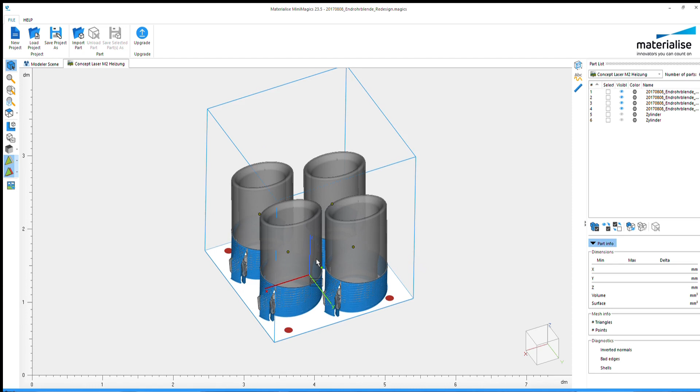So let's start with a simple breakdown along the process chain. Let's assume you finished the design of your metal part. The first step to printing is to prepare the data for the printer. Now, the cost of data preparation is mostly driven by the engineer or technician who is performing it.

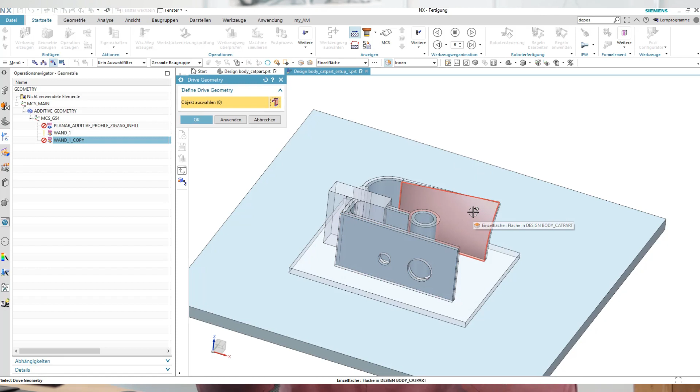The duration varies from a couple of hours for very mature data preparation software, for example for powder bed fusion, to more time-consuming programming steps for many of the especially high deposition rate technologies like powder laser deposition or wire arc deposition, which can take up to a whole day even.

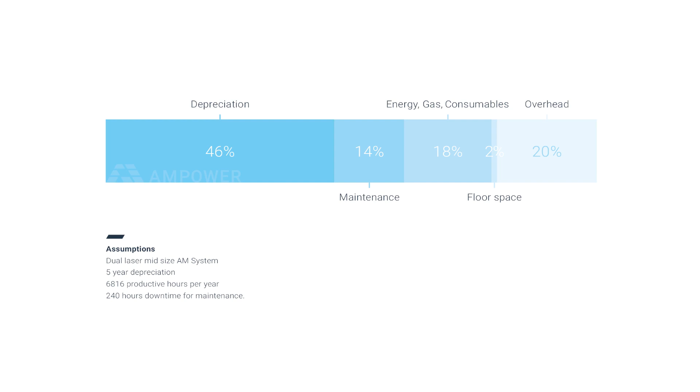Now, once you finish preparing the data, the next step in the cost calculation is setting up the printer. Major cost components now are the operator and the printer. The printer cost itself is mostly characterized by an hourly rate, which includes depreciation, maintenance, consumables, floor space, and probably an overhead. And the most variable factor here is the depreciation.

It is calculated by taking the total invest of the printer, including shipping, installation, and other necessary investments, and dividing this by the usable number of years that your local tax law is allowing you for duration of the depreciation. In Germany, that's 5 years in many cases.

Now, in order to arrive at an hourly rate of depreciation, you need to divide this annual value by the number of productive hours of your printer. In many cases, the hourly rates of metal 3D printers range between maybe 10 euro for a less complicated metal FDM system up to 100 euro per hour for larger powder bed fusion systems, for example, or even more than that.

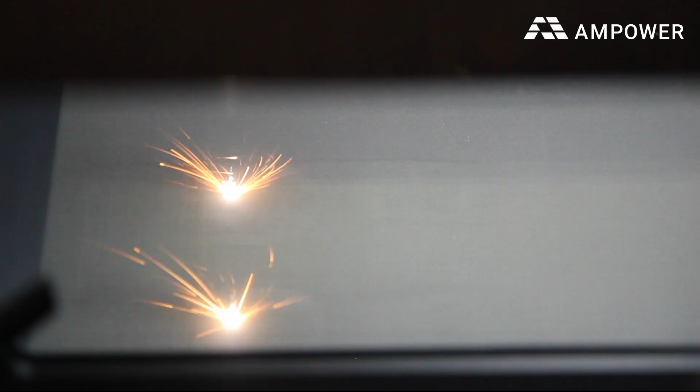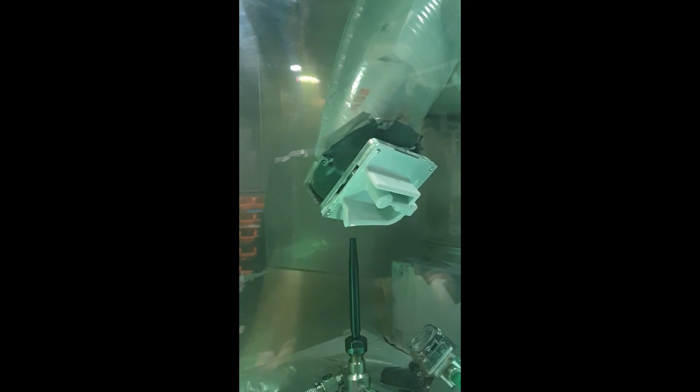Now, the next step of the process is the actual print. Here you have two major cost components, the material feedstock and the machine rate. For the material feedstock, you have to consider the printed part, but also some losses, especially while working with powder technologies. And material for the necessary supports you have to look out for, and for offsets or material that needs to be machined afterwards, you need to print that as well.

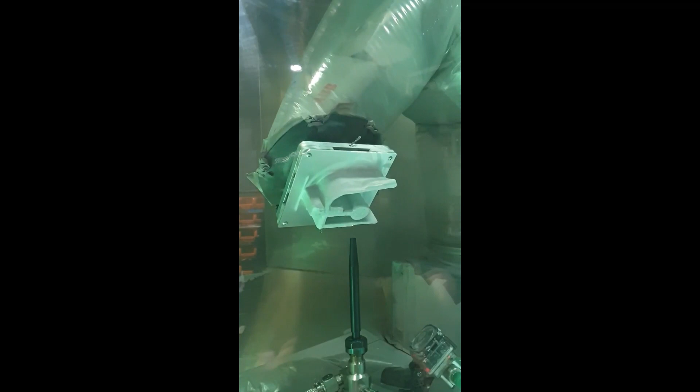Now, the machine rate is multiplied by the number of hours the printer is running. Pretty simple. Unfortunately, this value of machine run time is sometimes very, very hard to determine before an actual print. There are several estimations that have to be included, such as recoating time, deposition rates, cooling time, and packing density.

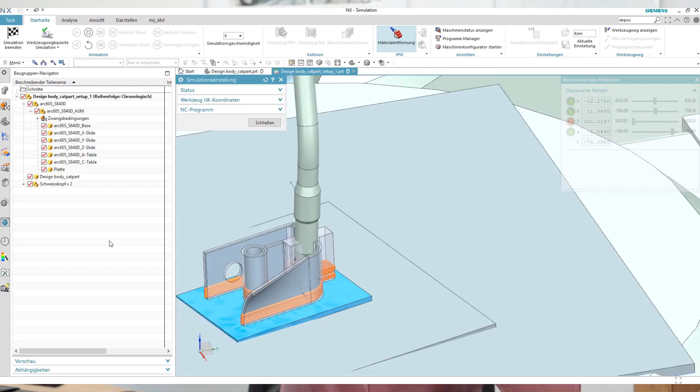There are three basic principles when calculating the production time of a printer, and they vary depending on the type of printer you're using. There are printers that are moving ahead along the base plate and printing the part step by step, and they're mostly only printing one part at a time, as you're used to in metal FDM or most of the HDR technologies.

This print time is very much dependent on how long the head moves to print the part, and thus is very much dependent on the actual volume of the part.

Now with powder bed fusion, it's a different story because you're printing probably multiple parts at once on a base plate, and you have a recoating process of the powder in between. But the recoating always takes the same amount of time, while the actual printing is depending on the volume you're printing. With binder jetting, it's yet again a totally different story, because in binder jetting you don't need supports, and thus you can stack parts on top of each other.

And the binder jetter, the print head, is actually printing, it's not dependent, the printing is not dependent on the volume you're printing. So the print time for the binder jetting process is always the same time, and the costs very much depend then on how many parts you can actually put into one print job. The more volume you can put into the print job, the lower the cost.

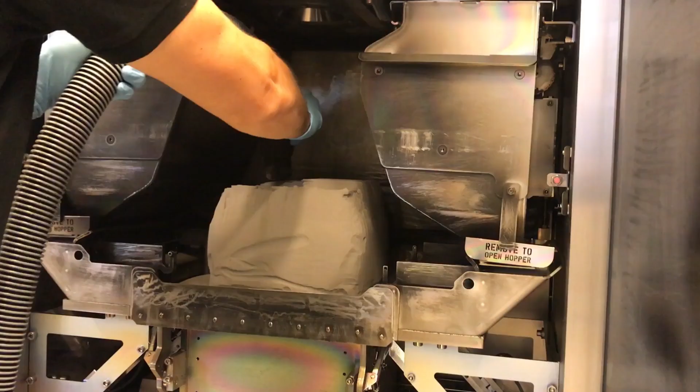Now, those are the basics of the printing itself, but what happens afterwards? After printing, the post-processing steps begin, and they differ a lot between the different technologies. For powder bed fusion, parts usually have to be depowdered first, which is followed by a heat treatment to relieve process-induced stresses, and afterwards parts can be removed from the platform and supports can be removed.

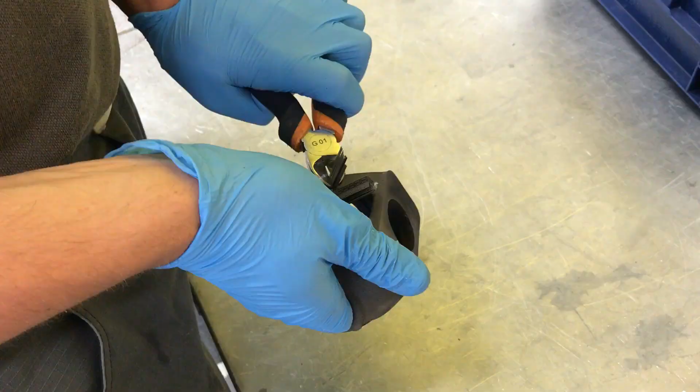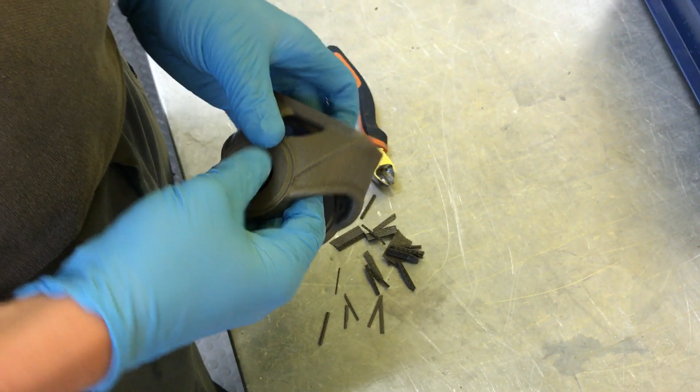Now, depowdering and support removal are still mostly labor-intensive and manual processes, and the costs are driven by the hours that a technician needs to go through them. Heat treatment, on the other hand, is quite a low-cost step, and it mostly depends on what kind of oven you use and how many parts you can move into the oven at the same time. Usually, though, the furnaces are quite low cost, and the costs don't have such a high impact on the total cost of a part.

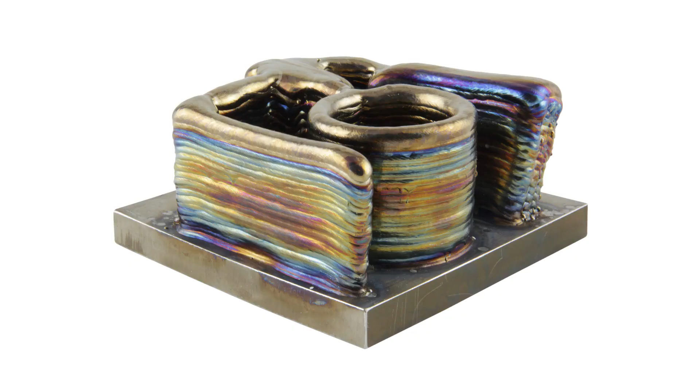For high deposition rate technologies, heat treatment can be an option, but it depends on the geometry. Some parts are simply too large to fit into a furnace, and many times the parts are not even removed from the build plate, but the build plate is actually a part of the printed part. But in almost every case, HDR parts have to be machined from all sides after printing, because you're just printing a raw part in the end, and those costs largely depend on what kind of part you're actually printing.

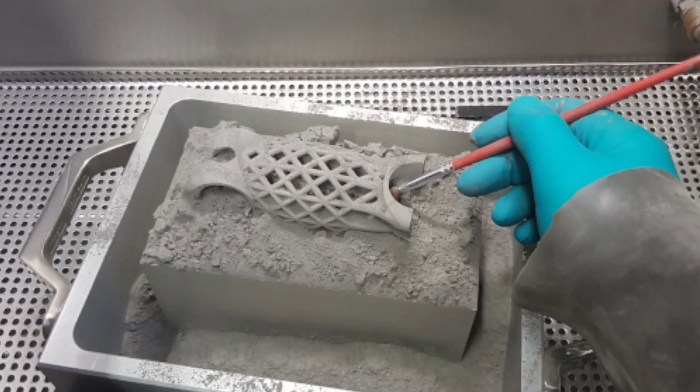Binder jetting parts have to be depowdered as well, which again is a very manual process, especially because removing powder from binder jetting parts can be more tricky since the powder is much more dense together. After depowdering, the parts have to go through a sintering process where the furnace and consumables such as gas or electricity have to be considered.

Now to the actual question, how much does metal printing cost? We developed a cost calculator which is very easily accessible via this website, and here you can type in the volume of your part, the dimensions of your part, the number of parts you want to print, and the group of alloys. The calculator then gives you a range of the cost, a min and a max value. That's the range of the cost where it might be for printing it in-house.

Now, if you don't just want to go into a calculator and don't have a specific part, and you just want a ballpark number of typical production costs for metal 3D printing parts, then you can use average values for different technologies and materials based on the cost per volume. If we neglect machining and any quality management related costs, I can give you an example.

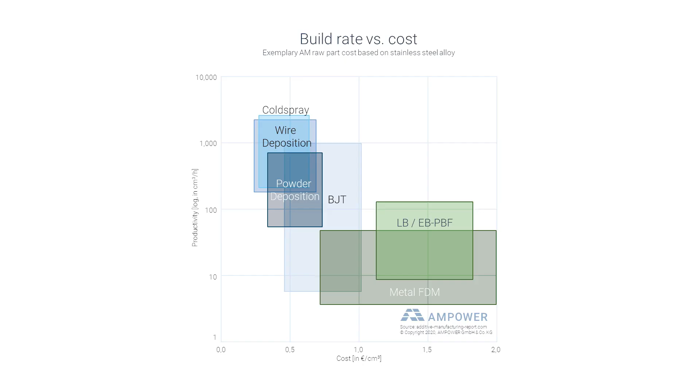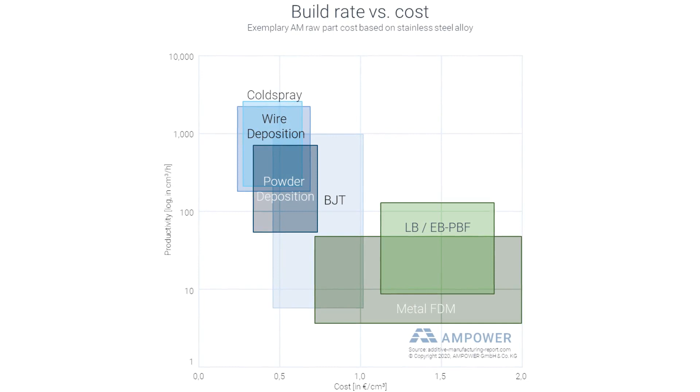For stainless steel, the cost to print a raw part varies between 0.3 and 2 euros per cubic centimeter, depending on the technology. Laser powder bed fusion and metal FDM are more expensive, while binder jetting and high deposition rate technologies result in lower cost. But be aware that those costs only stand for printing a raw part. All the machining is up to you, and all the other costs, especially with regards to quality management, you still have to deal with.